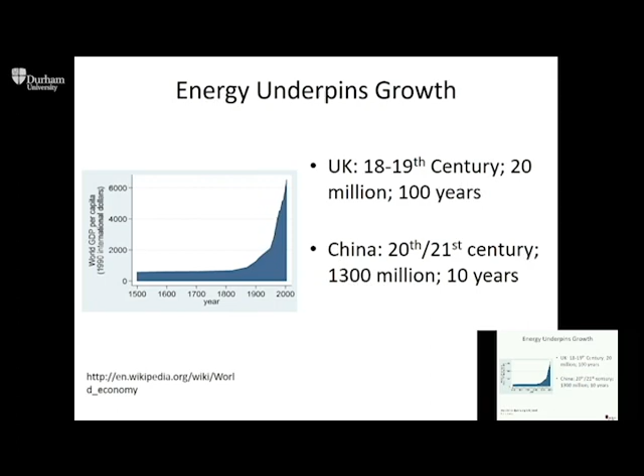You can see it's pretty constant until the last 150 years, and then it's really taking off, and that growth requires energy. The numbers there are the times it took the UK in our industrial revolution to double its GDP. At that time we had 20 million people, and it took about 100 years. The rate of change increases, so move things forward a couple of 100 years. China, with 1,300 million people, doubled its GDP in 10 years. That is basically being fueled by fossil fuels in both cases. So the rate of change is increasing.

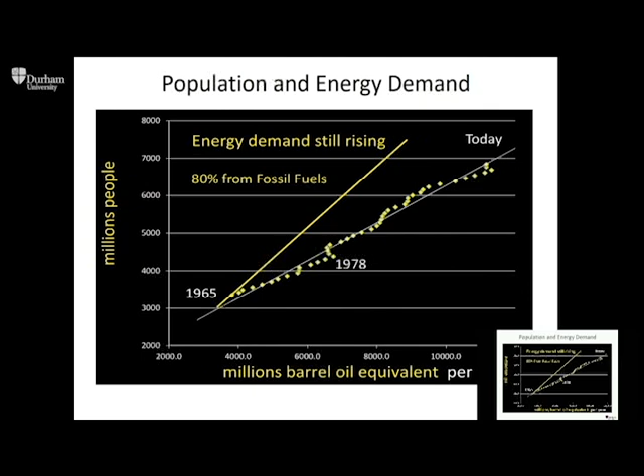The second general point then is that each person who arrives on the planet will use more energy than the people who are here today. So on this graph, we've got people on the y-axis, and energy, it's in millions of barrels of oil equivalent, on the right. The yellow line is the one-to-one line. So if each new person used the same amount of energy, that would be the line. You can see then that the population from 65 to today has more than doubled. And because that line is below the yellow line, each one of those new people are using more energy. So more people, more wealth, more energy. And that's going to continue.

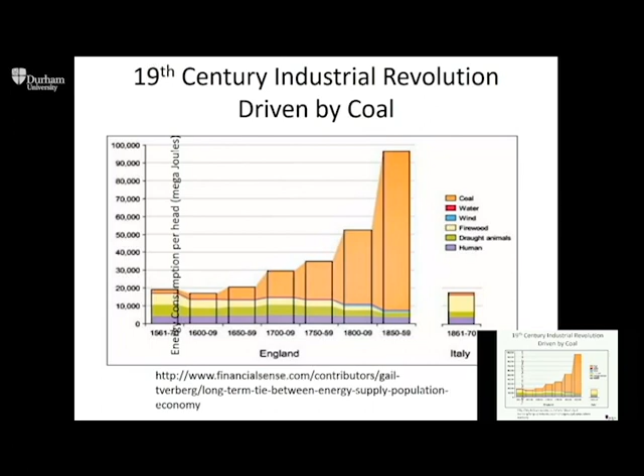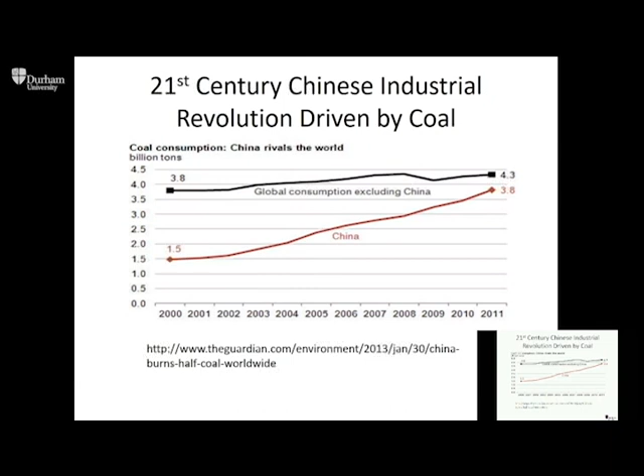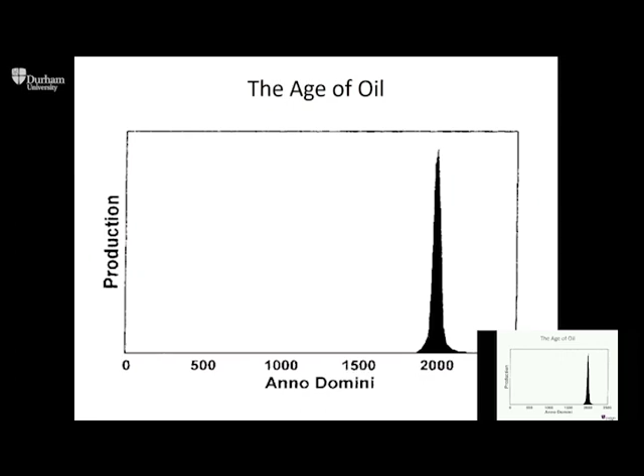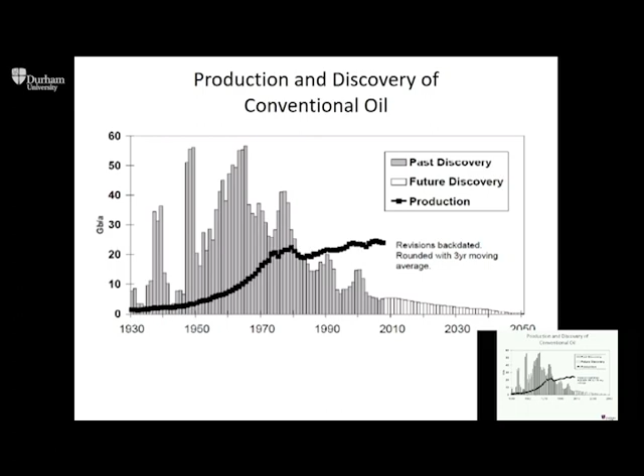Now, of course, new technologies come along and things change, and the one that you've probably heard of would be things like shale oil and shale gas, what we loosely call unconventional petroleum, where we actually have to go in and fracture the rock. These things do change these graphs. It is astonishing in the US what has happened in the last 15 years to modify that picture. Not radically change it, but to modify the picture.

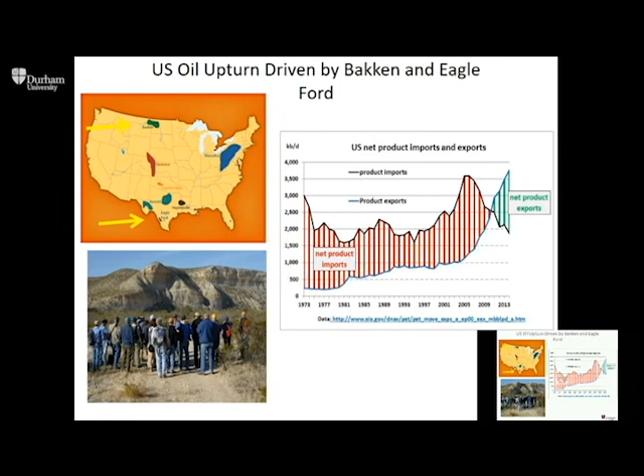In about a 10-year period, the US went from a significant importer to a net exporter with significant consequences. We, for example, get liquefied natural gas from Qatar, which originally was designed to go to the US. They have shale gas now, so it comes to us instead. So, lots of political ramifications of that. So things change. Oil is still probably on the decline, but new technologies come along and things change.

Let's bring it home now and think about the UK, particularly about shale gas, because that's probably the most politically interesting issue at the moment, one of the most important ones in terms of UK energy. The truth is that 70% of our energy comes from fossil fuels, and for oil and gas, we import about half of that. We were self-sufficient in 2004. So 14 years ago, we were self-sufficient. We now import about half. This is a radical change. I've also used the word sustainability; discuss what that means. But in this context, we've signed up to 40% CO2 reduction by 2030, 80% by 2050.

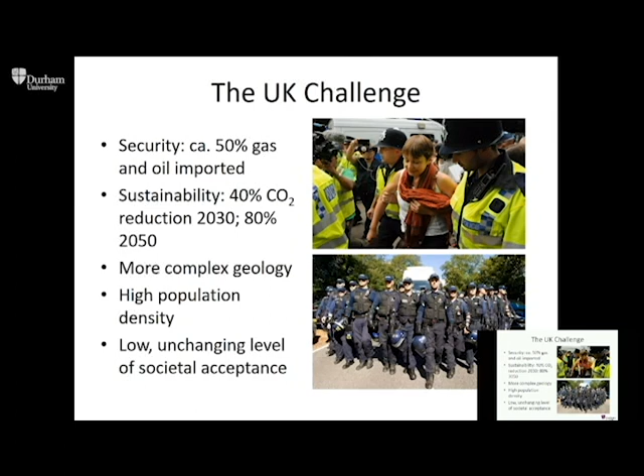That is a really big ask in terms of engineering and money. Not impossible, and we'll learn, I think, more about that today, but it's a big ask. And in terms of comparing the UK and the US, it turns out the geology is a bit more complicated. We have a high population density, and a lot of people don't want it to happen for a variety of reasons. And those that are sort of pro and against, those numbers haven't really changed very much in the last few years.

But it's quite scary here in the UK. So this is for gas specifically. And we're saying now that about a third of our energy comes from gas alone. So forgetting about oil and coal now, from gas alone, it's about 1/3. 80% of our homes are heated by gas.

The blue line there is UK production, the green line is UK consumption, and you can see that up to about 2004, there we go, that was the crossover point where until then we were producing basically what we consume, and you can see it dropping off here as the North Sea goes into significant decline. So we are now importing that gas, which is critical to our energy economy, from Norway particularly, and to some extent from Qatar.

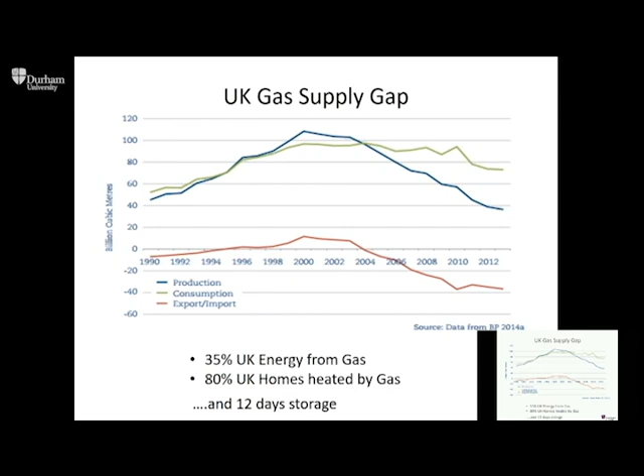The other issue there at the bottom, if you can just about see it, is that we're also not very good at storing it. So when we bring it in from Norway or wherever, we have very limited storage. So if the supply goes off, in something like 12 days, we're going to feel pretty chilly. So very interesting sort of political comments.

So what about, I've got two more slides I think now, in terms of shale gas in the UK. Is it going to happen? Is it not going to happen? We learn from the US. And these are data from the US. We have gas production from shale on the y-axis, and we're going from 2000, because the shale industry didn't really exist in the US before 2000. This is a real snapshot of time. And they have ramped up production to an unbelievable extent.

So going from 0 to these sorts of numbers around 30 billion cubic feet per day, the numbers probably don't mean very much. But interestingly, and this is from the US government, the Energy Information Administration, thinking it's going to be peaking somewhere around now and then declining steadily through to 2040. That's a lot of gas. How do they do it? How many wells are needed, and what can we learn from that?

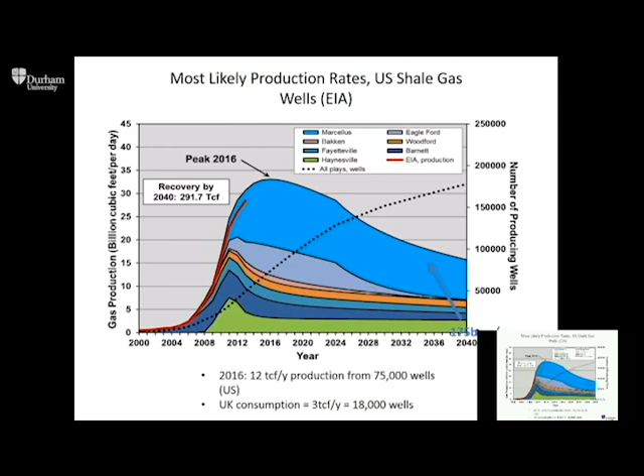And this is where it becomes astonishing. So the number of wells is this black dotted line in here. So to produce what they're producing today, about 2016, they have drilled something like 100,000 wells. This is an astonishingly large industry. And you can play that in two ways. A big industry, jobs, money, but the other side of it is the environment. Do people want that to happen in the UK? And that's the discussion really, I think, today.

So here then in the UK, oh, that's interesting. Obviously I did it on a different, probably 4x3 rather than 16x9. So the red area there should go all the way across into Lancashire as well. So if anybody here has got a Lancashire base, then that's where. So the shale gas area is basically a square across here. Don't worry about the geological cross section.

But if you take some of the US data, learn from that and then import those numbers to the UK and say it's going to be about the same, what do we need to do in this country in order to make shale gas a useful thing quantitatively for the country? This is not a couple of small companies making a few quid. Does it matter for us as a population? And I reckon that in order to recover something like 40 trillion cubic feet, we use 3 trillion cubic feet per year, so that's about 13 years of our gas. Not insignificant, but not a game changer in terms of long-term going forward, I would argue.

You probably need to drill something like 20,000 wells. Now, you can drill a bunch of wells from one pad, as we say, maybe half a dozen, maybe even 10. So we're talking about perhaps 3,000 locations. Can we do that geologically? Can we do that in terms of where the cities are? Et cetera, et cetera. But that gives you an idea about the scale of what will need to happen to really make this a flyer in the UK. And you can see then we've got a population of 8 million.

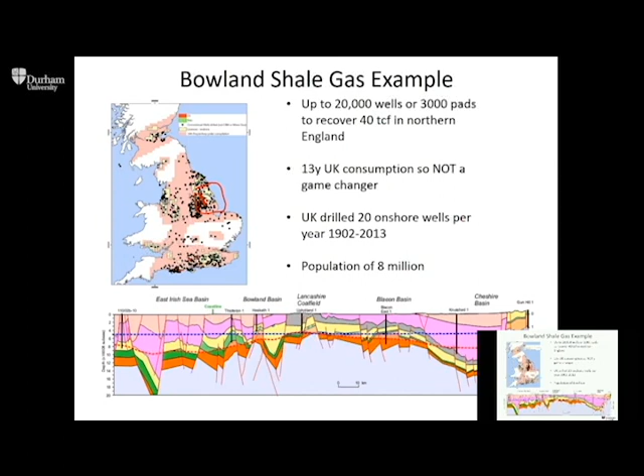And then, final thing, in terms of history, we've drilled about 20 onshore wells per year historically in the last 100 years. So for this to happen, you have to ramp the industry up way beyond what's happened onshore in the last 100 years. And I think, John, that is my last slide, yeah.

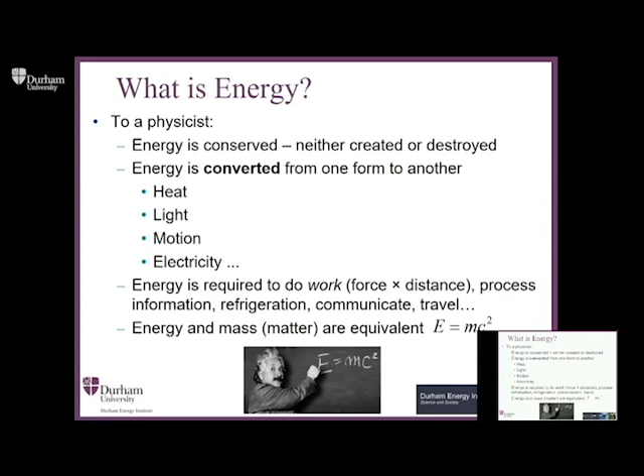I don't have many equations in my presentation, but this one is so well known it probably doesn't even count as an equation anymore. It's more of an emblem on a t-shirt. But you can see there that energy and mass are equivalent, and that's important as well when you think about processes like nuclear energy or burning coal. It gives you a sense of why you get so much energy from matter.

And it's quite interesting when you get involved in projects looking at energy in the developing world, the transformational nature of the availability of just small amounts of energy to illuminate houses so that school children can study at night and so on is really important. So that's a part of the challenge that we face. And of course, our appetite for energy is growing all the time.

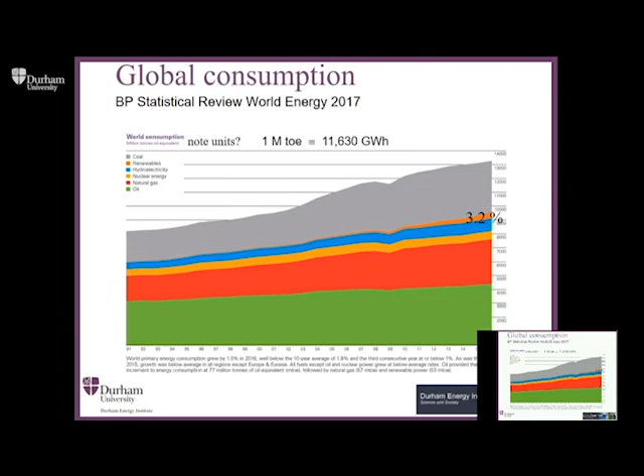What's interesting is that energy is all about politics as well as science and engineering. If you break down by geographical regions, Europe and Eurasia have the highest percentage, 5% of total energy consumption coming from renewable resources. In the Middle East, they've got an almost complete reliance on natural gas and oil, whereas in Asia Pacific, they've got a much larger reliance on coal.

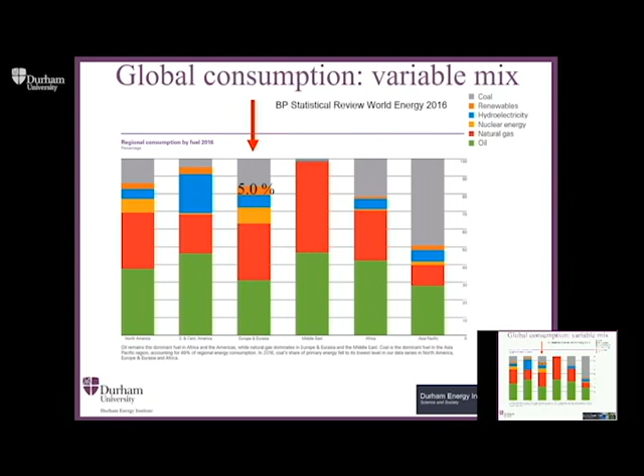So again, much of the energy technology, the way it's used and implemented and developed, is a consequence of the political framework in place in particular countries. And of course, much of it is driven by economics.

Up here we've got wind and wave, so you can see that each of those renewable technologies has a certain amount of energy it's able to contribute. On the right-hand side, these are the finite resources: natural gas, petroleum, uranium, and coal.

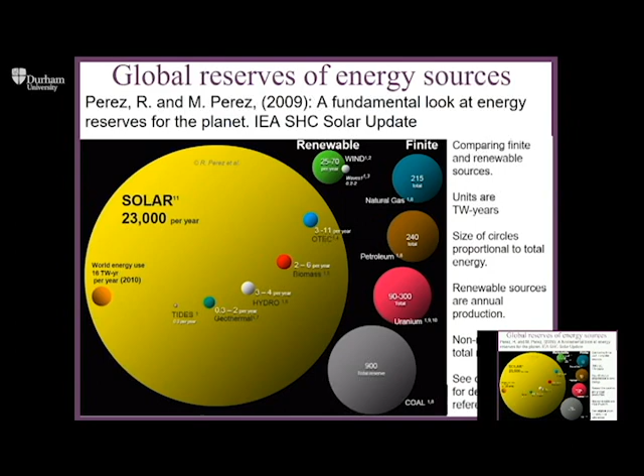If we were to continue mining the coal, we would have something like 70 to 80 years worth of coal reserves, or maybe slightly longer depending on the proportion of coal we choose to use. So in terms of making the energy transition, we have to move from non-renewable to renewable resources.

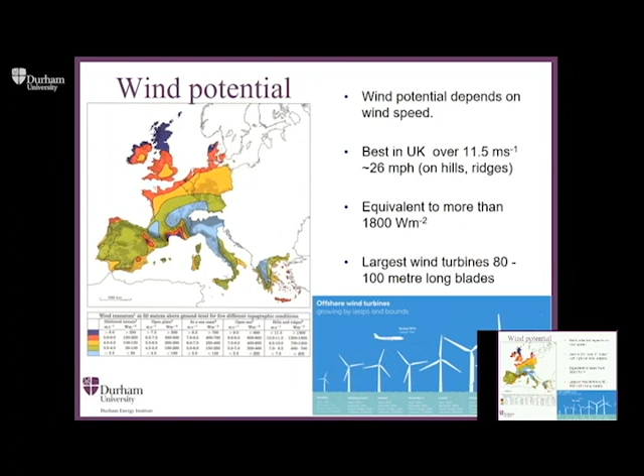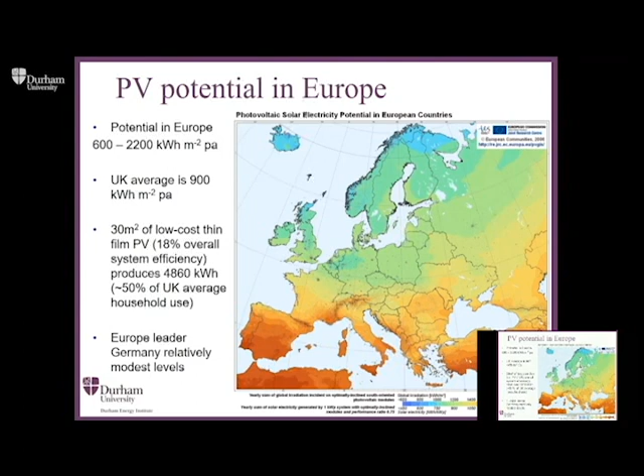The other point to make is that for many years, Germany was indeed the world leader in solar PV because of political decisions made in that country. Of course, Germany doesn't have the highest solar resource - that's down in North Africa and the Mediterranean.

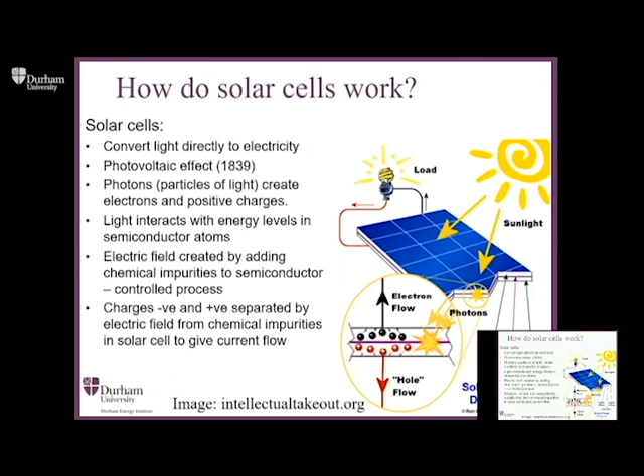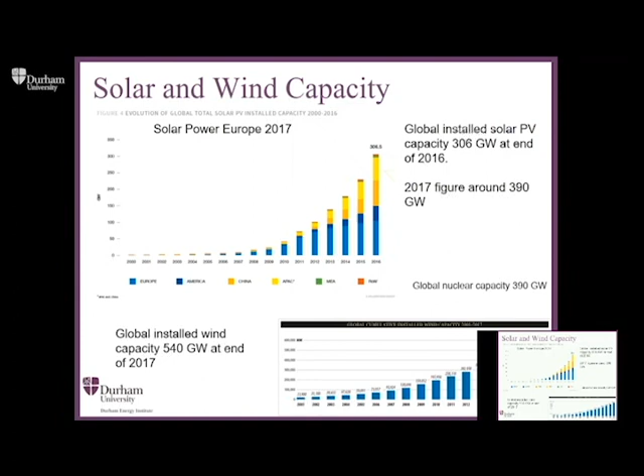So the challenge with renewable energy is that we need very large amounts of area, either large area wind turbines or large area of solar panels, to capture large amounts of energy. And that comes with the challenge of building that infrastructure, developing it, and integrating it into our current energy system. So I think that's everything I wanted to say - thank you very much.

Douglas, thank you. I see that you, unlike the scientist in the picture there from 1954, you're minus a bow tie. Well, I say that to students to set a new standard in dress. I didn't think there was much I could tell this group about dress.

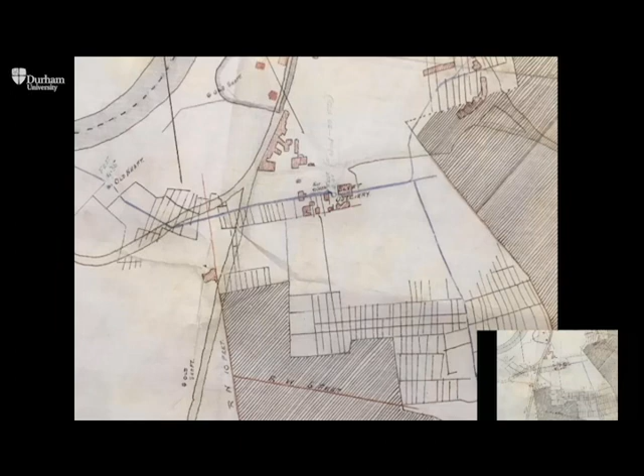So I'm going to talk about developing a legacy. First, to give you some context, let's go back almost exactly 160 years. The red circle on this plan shows where Elvit Shaft was sunk. Elvit Shaft is actually in the atrium of the building opposite the gatehouse you came through this morning.

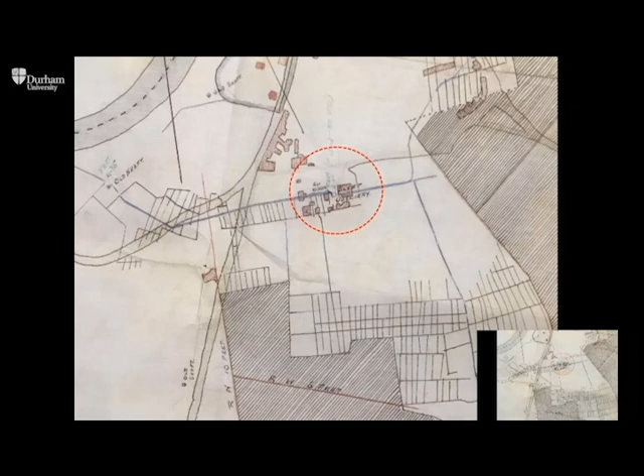We're talking about a shaft drilled in 1858, accessing a variety of coal seams. The hatched areas on the plan show what was worked beneath this site, just on one seam, at about 60 metres below us. There are 9 shafts within this complex of buildings we're in today, but we only ever found 8 when the buildings were being constructed. So do let us know if you find the 9th.

So I'm here to talk about heat. I'm obsessed with heat, that's really my thing. The way I'm framing this is that if you look at how the UK's energy supply has been decarbonised to date, in terms of electricity supply, we've decarbonised round about 50% of our supply. For heat, our supply from renewables is far, far less, and we're still heavily reliant on natural gas for the majority of our heat. Heat makes up half of our energy demand. So when people think about renewables, they think about electricity, but it's really important to think about renewable sources of heat as well. If you take that message home with you today, then my job is done.

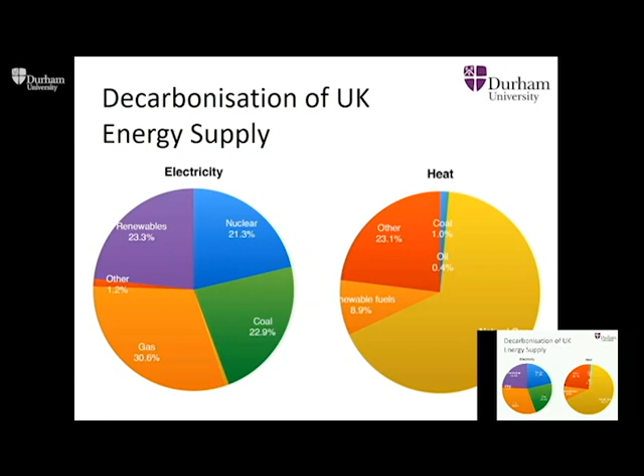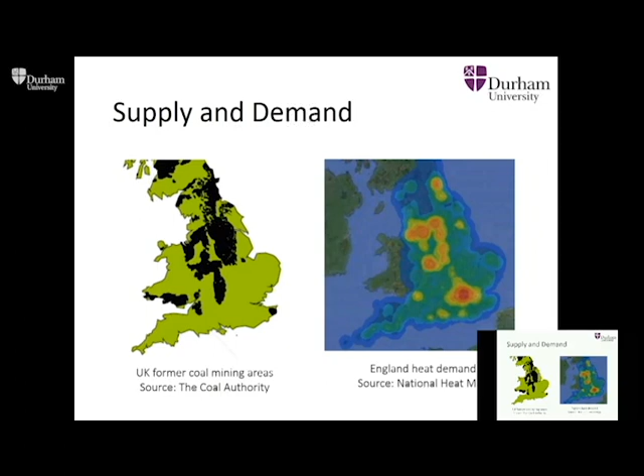So in developing a legacy, what have we got? We're thinking about the UK more widely now, not just here on this site. 15 billion tonnes of coal were mined over the past century or so. To put that into context, if we took that coal out and spread it over the land surface of the UK, you're looking at a layer about 5 centimetres deep. Why is that important? Because that equates to void space left underground. Admittedly there will be some subsidence, so between a quarter and half of that void space will have been lost, but we still have significant void space underground because the mines are abandoned, pumping has stopped, and they're now flooded with water.

And we can use that water. It's sitting there at temperatures between 12 and up to 18 degrees in some areas. We can take heat from that and use it as a source of low carbon heat. We can also put heat back into the subsurface and use the mines for energy storage, which is something we're really interested in as well. And the good thing is that around 30% of UK homes overlie coalfields. It can also offer a source of cooling.

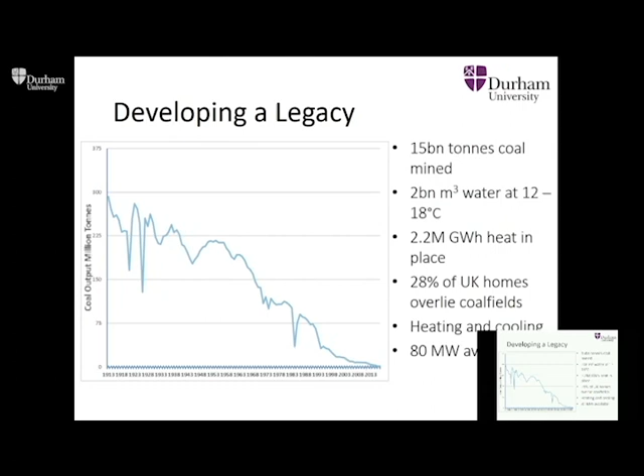I mentioned that these mines are flooded. The Coal Authority is the regulating body for our abandoned subsurface and all the coal mines. They currently pump water out at several locations to stop unwanted emergence of mine water. With what they're pumping now from several sites across the UK, mostly in the northeast area, there's 80 megawatts of heat currently just being disposed of to surface watercourses. So there's huge potential there, and they're very interested in this, and we're talking to them about it.

So why are we thinking about the mines? I've already mentioned that they have the opportunity to supply, support and store heat. We've been a net importer of gas since 2004, and if we think about where our gas comes from - some of my other colleagues have already touched on this - we're basically a net importer, so we are reliant on other areas. The gas we get through the European pipelines, some of that is also controlled by Russia. So we're thinking about energy security.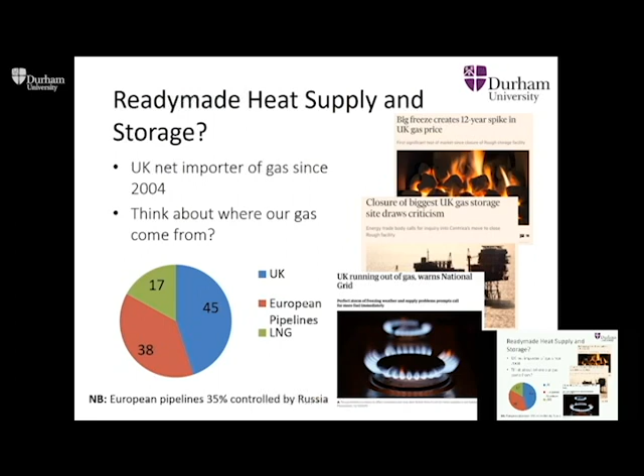Also, we have 17% of our gas coming from LNG. That has to be compressed prior to being transported, so it's a much more carbon-intensive fuel than maybe indigenously produced natural gas or gas coming through a pipeline. So we need to think about that as well.

So how this could work, we've identified where the areas of mines were. They were incredibly well surveyed. We have access to the abandonment plans for most of the collieries in the UK via the Coal Authority. So we can drill boreholes. We can look at using existing shafts as well, but having looked at a few over the course of the years, a lot of them are filled with rubbish. So often it's better to drill a new borehole so you can have it exactly where you want it, have it close to the end user, which of course is one of the considerations for renewable heat.

You can reverse it to provide cooling, so you can take heat from buildings and use the mine water to cool it, so the heat will go into the mine water and you put the mine water back underground. So it's all done through heat exchangers. There's no need to have mine water exposure at surface, and in fact you probably want to avoid that if you can. It just makes things easier. And there's no reason why you couldn't put other sources into the subsurface. So if you've got an industrial source of waste heat, that could be put into the abandoned mines as well to top up the reserve there.

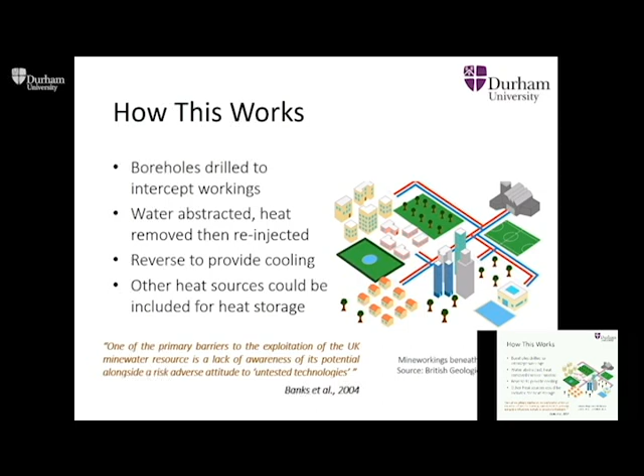And one of the key things, we know we can do this. We've been drilling into mine workings for years. It's more complex than drilling into non-mine terrain, but it's easily achievable. We can pump water out. It's just getting people aware of this potential and also thinking that it's not risky. A lot of people immediately think of risk. It's a relatively low risk approach.

So if you go to the supermarket and buy a nice bottle of real ale off the shelf, it'll be at the temperature of the supermarket, so maybe 20 degrees, 18 degrees. You want to drink it when it's maybe at 4 degrees or 6 degrees, although maybe real ale I think should be served a little warmer. So you put it in your fridge, and then you go back to it in a few hours' time, and lo and behold, it's cold. So where has that heat gone? So the heat is why the back of your fridge is warm.

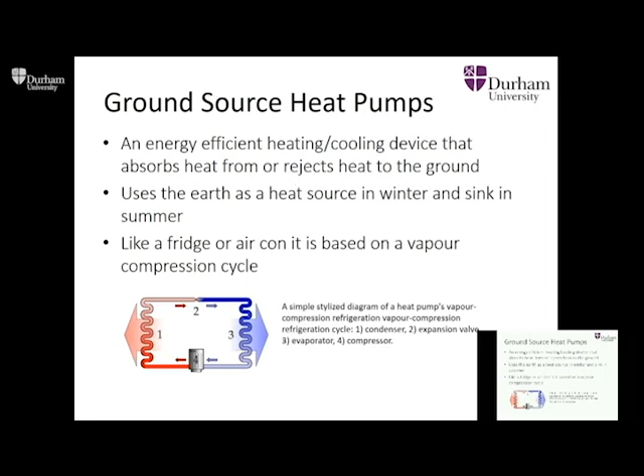So using a vapor compression cycle is the way the heat is abstracted from your bottle of beer you put in the fridge. The heat is rejected at the back of the fridge, and that's why the back of your fridge feels warm. And if you were to use this in a domestic setting, that warm bit at the back would be something like an underfloor heating system. If anybody wants to discuss the nuances of heat pumps, I'm happy to do that over a coffee.

So this requires a new approach. We need to stop thinking that heat needs to come from hot things. So, as the speaker from the history department will talk about later, we're talking about heat from fire originally, then we've used gas boilers. We've used things that have produced high temperature outputs. We talk about 80 to 100 degrees. Yet our living spaces are only heated to 20 degrees, and many hot water taps and things that you buy now because of building regulations are restricted to 38 degrees as well. So why are we overheating water to achieve heating of our homes?

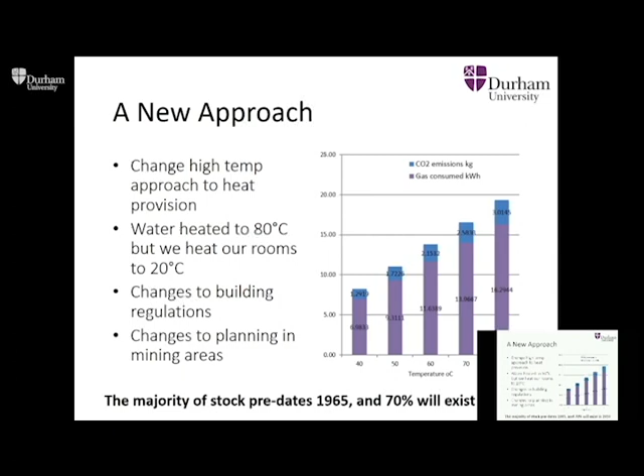And we also need, as well as maybe changes in building control, changes in planning as well, so that areas that do have abandoned mines do think about this as a source. And one of the key things we need to think about also is retrofit. So the majority of our housing stock is older than 1965, and we'll still have 3/4 of that there in 2050. So as well as thinking about putting it onto new builds, which is often the easier way to start, we also need to think about how we could retrofit this to the homes and buildings that we have already.

So there's several examples of where this works. The most local is Lanchester Wines, who have a large warehouse, which is a bonded warehouse for the storage of wine. You see there's a bit of a theme going here. And this requires a temperature-controlled environment, which is ideal for a heat pump. A heat pump works best the more you use it. It works most efficiently the more you use it. So temperature-controlled environments, such as archives, hospitals, any kind of food storage facilities, are great.

The Coal Authority have a small system at one of the collieries where they're already pumping water that I mentioned before. We had the pleasure of visiting a super scheme in the Netherlands, which has mine water at 28 degrees and heats over 200,000 square metres. So huge potential there. And the one in Canada has been operating since the 1980s and replaced a diesel system and paid for itself very quickly.

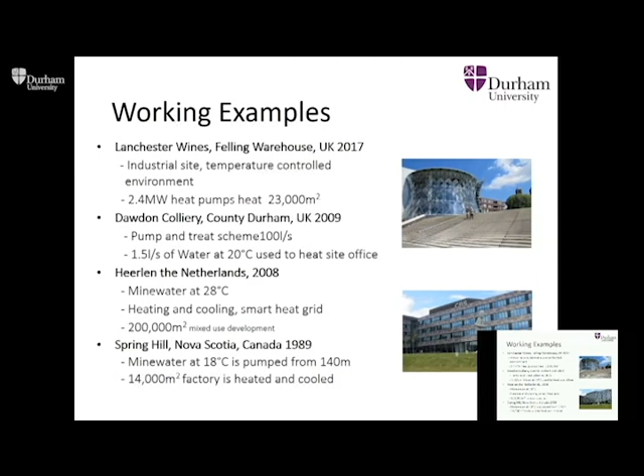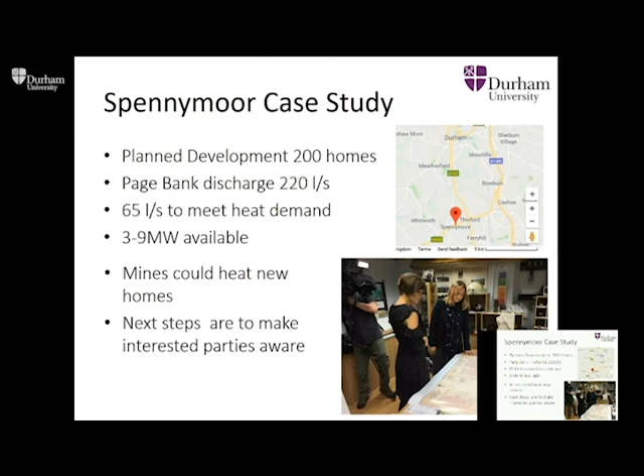So I did a case study of Spennymoor. We had 200 homes planned for this area, and there's already one of these pumped discharges that the Coal Authority have. And we looked to see what was going on there, and we realised that we could meet the heat demand of these 200 homes with what's provided in the mine there. So the next step is just to try and convince people to think about this and incorporate this in their development plans. I'll skip that one as we're running a little short of time.

So I just want to say really that we clearly need to think about decarbonising heat and moving away from gas and thinking about how we store and provide heat and using low temperature sources of heat which are widely available. We've got abandoned mines under many of our population centres, so that's a really good opportunity for us there. So we've got ready-made infrastructure, given that we have little storage.

In Andy's presentation, he talked about 12 days gas storage. We have little electrical storage yet on our networks. We have a huge potential for storage in this system; the infrastructure's there, full of water, ready and waiting to go. And if we connected those households I was talking about earlier, the ones that are overlying the coalfields, we could save around 11 million tonnes of CO2 annually if we use that resource.

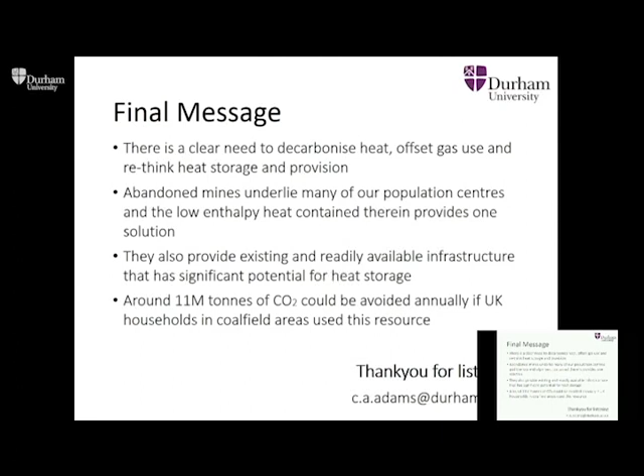Well, I'm an engineer by background and training, electrical engineer. And I'm going to talk a little bit about a specific piece of technology and how we utilize energy rather than where we get it from. I'm not too concerned about where we get it from in this presentation, but I'm concerned about how we use it and telling you a little bit about what I think some quite key challenges are that we need to try and address in the future. And that's all to do with electric motor technology, which is primarily my research area.

So I've been involved in electric machine or electric motor research for a while in industry, but also here at Durham. So just to have a little bit of a recap, and I also lectured to 200 undergraduates in here on this very topic. But what are electric motors? Well, they're a conversion device. They're a physical piece of engineering. We take energy in and we produce some sort of more useful energy output. Usually that is electrical to mechanical. And in the context of most electric motors, that is rotary motion. So we use electricity to create rotary motion.

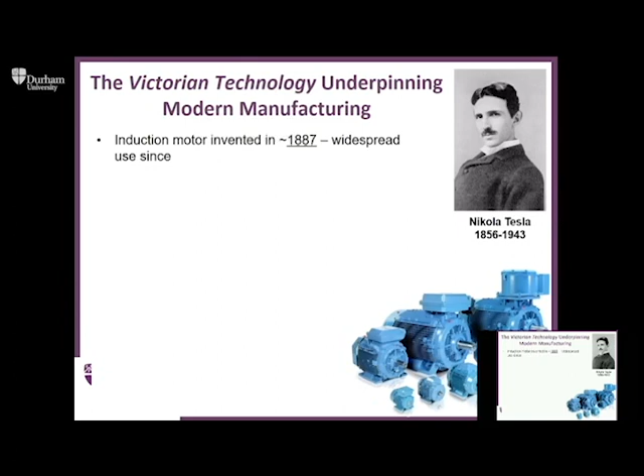They were invented by Nikola Tesla. You might have heard of him. He was a Serbian-American inventor. So they use alternating currents. They're connected to the national grid, whether you get your primary energy from solar, wind, coal-fired power stations, etc. It goes into the national grid, and it goes into all sorts of things.

Industrial drive, so in a factory you might want to drive a pump, you might want to drive a fan, conveyor belts, that type of thing. These devices are numerous in nature. We can also use them as generators, so for wind turbines, or even more modern is electric vehicles. So we can use that electric power, convert it to rotary motion, put a wheel on the end, and it will drive you along the road quite happily.

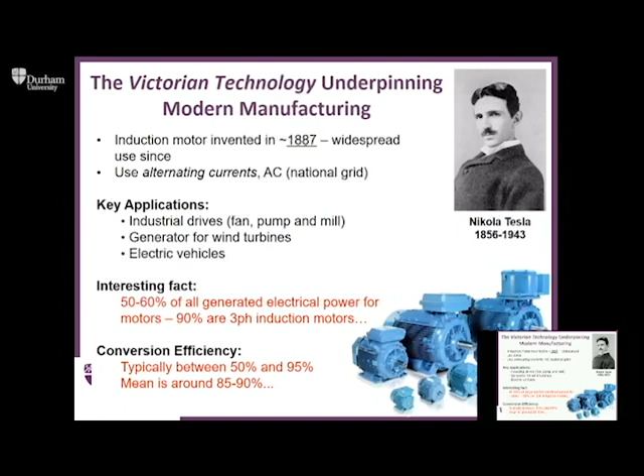And their conversion efficiency, that is how well we convert electrical to mechanical energy, is somewhere between 50 and 95%. The mean is probably about 85 to 90%. So at best, we lose 10% of all the energy that we use. And bearing in mind that is a very large amount because 50-60% of all electricity goes into machines, we're wasting a lot of energy.

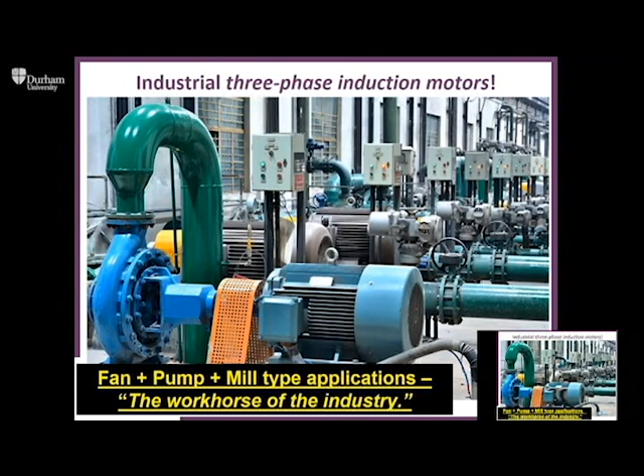And if you just look at a typical factory, this is a picture of a pump type scenario. Hopefully this might work. There's 1, 2, 3, 4, 5, 6. There's about 10 electric motors in that very small corner of one single factory in the world. So they're very, very widespread. And every one of those is wasting at least 10% of the energy that it consumes. So it's typically the workhorse of industry, but we need to really improve that.

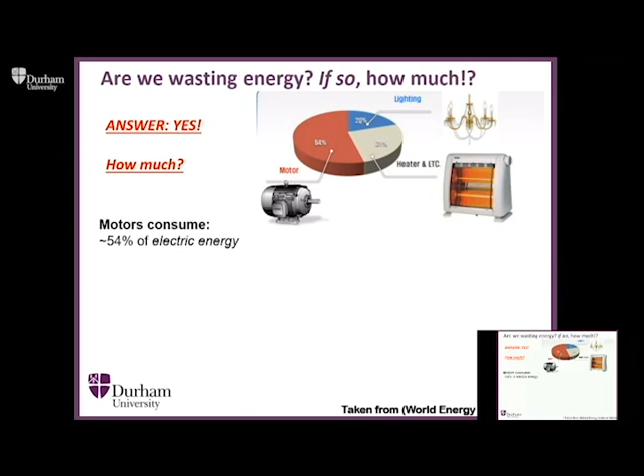And if we were able to somehow advance the technology from this Victorian hangover by 3%, and 3% is not very much, going from 90 to 93 is not a great technological leap, we could perhaps save in the region of 108 nuclear reactors from being commissioned around the world. So this is quite an interesting one. Why don't we just go ahead and do it?

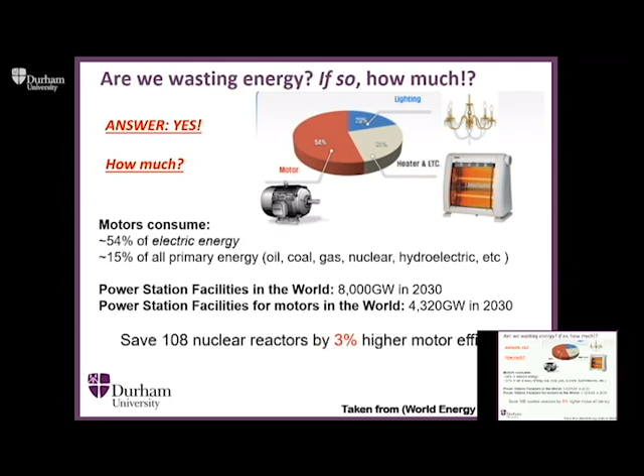We could do a lot better, but perhaps the thing is we need some policy. We need industrial incentives to encourage people to develop this technology, and encourage factories, who are typically very conservative in their adoption of technology, to upgrade their machines once they have been developed. It's technologically possible, but we need that policy there to do it.

So all of these Victorian electric motors produce a force which makes our rotary motion. We can do that in a number of ways. One way, the modern way, is to use permanent magnets like you have on your fridge. Two magnets attract and repel. That's a force we can use inside an electrical machine to produce our rotary motion. Usually the ones on your fridge are very weak. We need much stronger permanent magnets to create rotary motion in an electric motor.

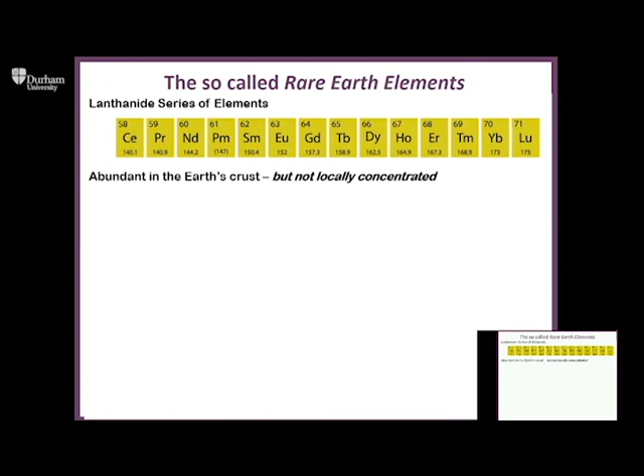So we use these things called rare earth elements. And they're from a series of elements on the periodic table. They're called rare earth, but they're actually relatively abundant in the Earth's crust. It's just that they're not locally concentrated. So when you mine these things out of the ground, you typically need to mine quite a lot in order to get a very small permanent magnet.

So we use specific ones, neodymium and dysprosium. We fashion them into magnets. We create some sort of high-performance electric motor, which can go into various applications such as wind turbines or electric vehicles. However, there's actually a big problem with this. So these two technologies here, wind turbines and electric vehicles, are seen as green.

Well, if you mine a lot of stuff out of the ground, that's not particularly green. And there's a few different elements that they're usually concentrated with in the Earth's crust, like thorium, that are not particularly nice things. So perhaps that is a problem. Also, China owns about 90% of the economical reserve. If you own it, you control it.

So in 2011, the price of these magnets went up by 3,000% because there was an export embargo and you couldn't get them. So these types of applications, especially automotive, don't like that type of thing. So they're looking at alternative technologies, and perhaps they're not sustainable after all. In the long term, do we want to continue mining things out of the ground?

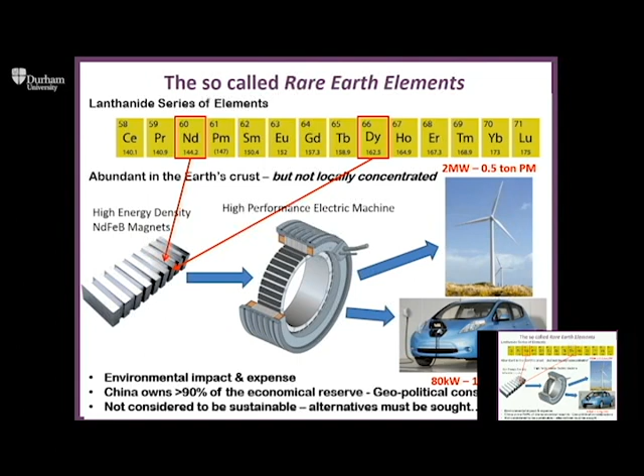And just to give you an example, a 2 megawatt wind turbine, a very small wind turbine, contains about half a ton of this permanent magnet material. To get half a ton, you probably have to mine about 400 tons of earth. So it's a significant problem. An electric vehicle has about 2 kilograms of permanent magnet, but really, is this sustainable in the long term? Perhaps not.

So just in summary, to tie up, Victorian technology, we use it every day. It's very, very widespread to convert electrical to mechanical power. However, we need to change it. We use a lot of energy. We need to improve the efficiency, so we need to develop the technology. But in order to take up its adoption, we need to really move policy forward.

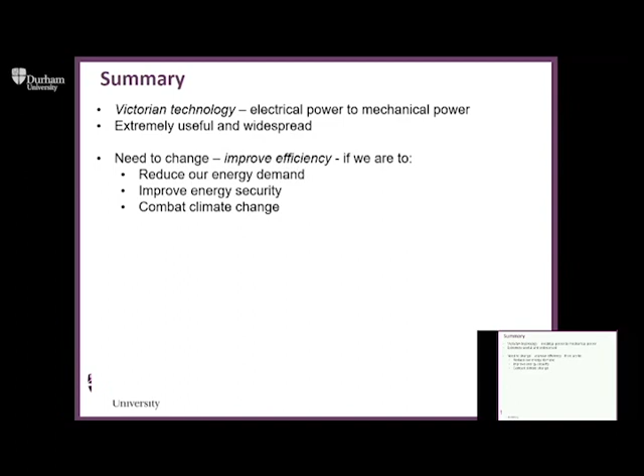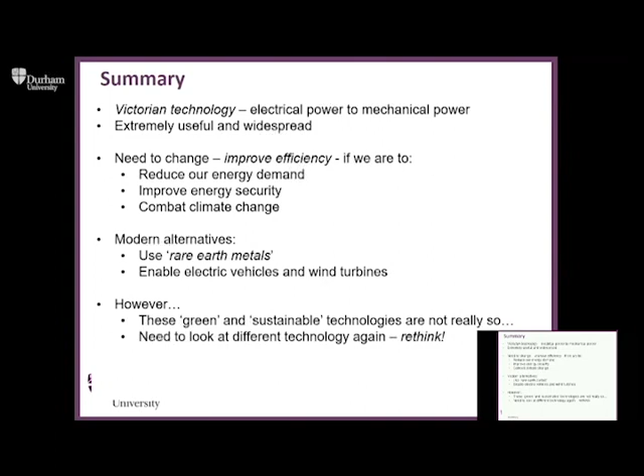Modern alternatives, in order to try and combat this, using rare earth elements from the periodic table, are not a great way forward. They're considered green applications, but really they're not. So we need to have a rethink. We need new technology options and good government policy. Let's discuss that. Thank you.